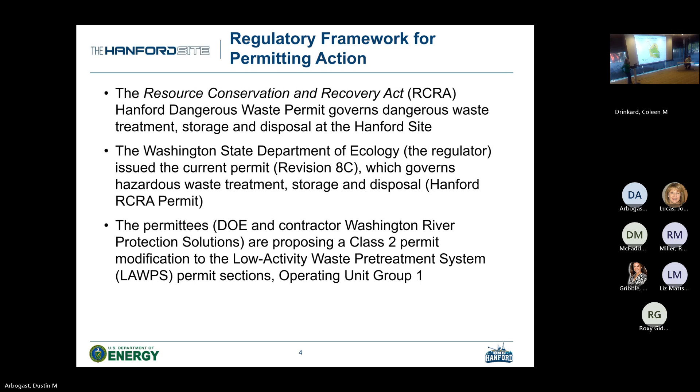The Tank Side Cesium Removal system, or TSCR system, is DOE's initial demonstration aiming to achieve low activity waste pretreatment capability under the Direct Feed Low Activity Waste Program. TSCR began processing waste since January of 2022, and has so far processed over several hundred thousand gallons of liquid waste.

As I mentioned earlier, the TSCR contains a filtration unit that removes the solids present in the liquid waste. It also contains an ion exchange column filled with a special type of media called CST, crystalline silicotitanate, which absorbs the cesium present in the liquid waste.

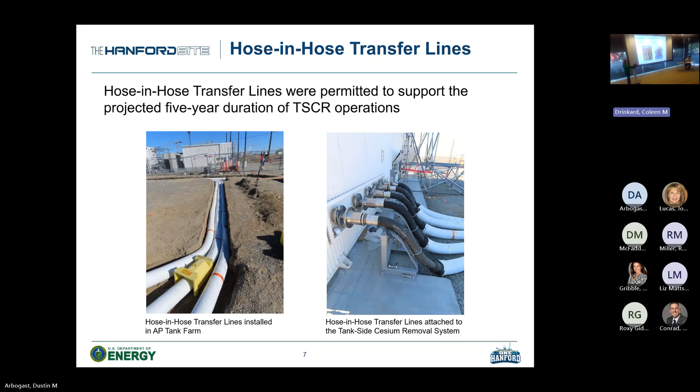The current permit mod states that the TSCR hose-in-hose transfer line has a 3-year service life, and after 3 years it will be replaced by another set of transfer lines. Any use of the TSCR system beyond this initial demonstration period will require hard-walled piping.

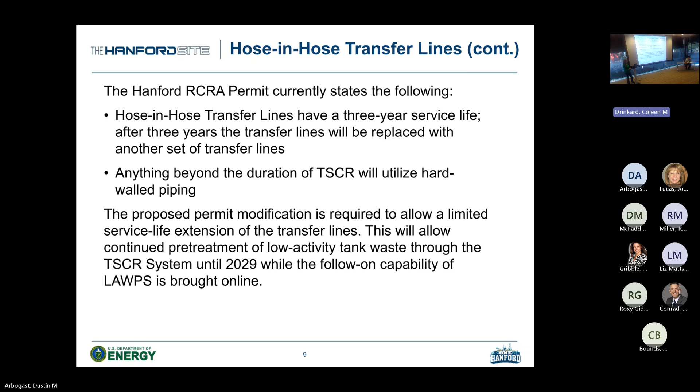So we are proposing a permit modification to allow a limited service life extension of this TSCR hose-in-hose transfer line until 2029, that is 10 years from the manufacture of the line. This extension will allow TSCR to continue treating liquid waste until phase 2 of the low activity waste pretreatment system project, the LAWPS project, is launched as the follow-on capability for continuing pretreatment of the liquid waste.

As part of monitoring the TSCR hose-in-hose transfer line, there are leak detectors installed at the low point of each transfer line. TSCR operators also perform routine radiological surveys of this transfer line, and at the end of each processing batch these transfer lines are flushed. So far, no problems have been experienced with this transfer line.

This TSCR hose-in-hose transfer line was procured under the same specification as the hose-in-hose transfer line currently used for single shell tank retrieval operations, and the life extension methods established for that retrieval operation line have proven successful. A similar life extension engineering evaluation was also performed for the TSCR hose-in-hose transfer line.

This service life extension engineering evaluation is an established process which factors in multiple criteria like processing conditions, chemical composition, radiation levels, ambient conditions, and other relevant factors to ensure that the integrity of the TSCR hose-in-hose transfer line is maintained during extended use.

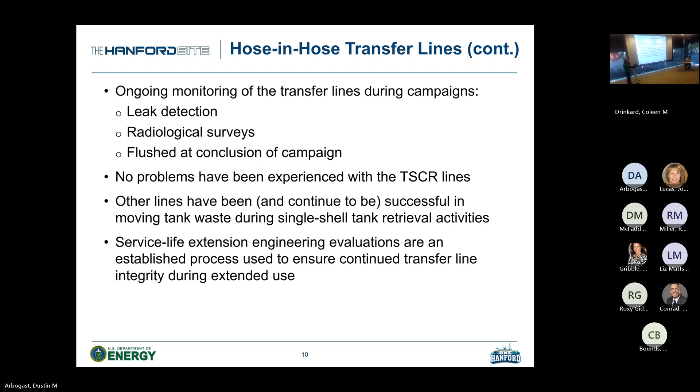This proposed permit modification would extend the service life of the TSCR hose-in-hose transfer line from 3 years, from the start of its first use, to 10 years from the manufacture date. The first component of the TSCR hose-in-hose transfer line was manufactured on May 1st, 2019. So we are proposing the service life extension of the line till May 1st, 2029.

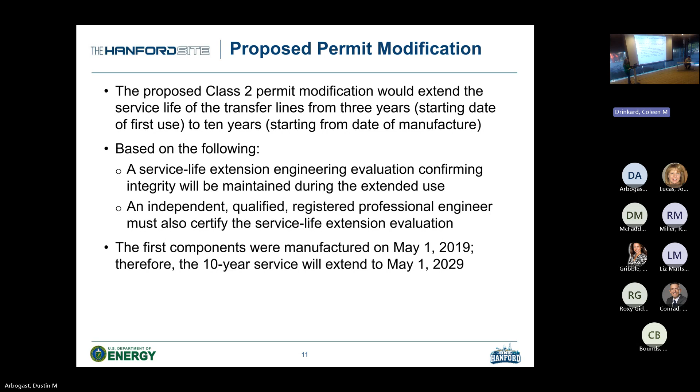As mentioned earlier, we performed a service life extension engineering evaluation for the TSCR hose-in-hose transfer line, and that evaluation confirmed that the integrity of the line will be maintained during this extended use. In addition, an IQRP, an independent qualified registered professional engineer, certified that the factors evaluated during this service life extension will not degrade the transfer line before its maximum life is reached.

This proposed permit mod will update the following sections of the permit, which include the unit specific permit conditions, addendum C, the process information section, appendix 2.11, the IQRP report section, and the last one, appendix 2.15, the operating documents. That brings us to the end of my presentation.

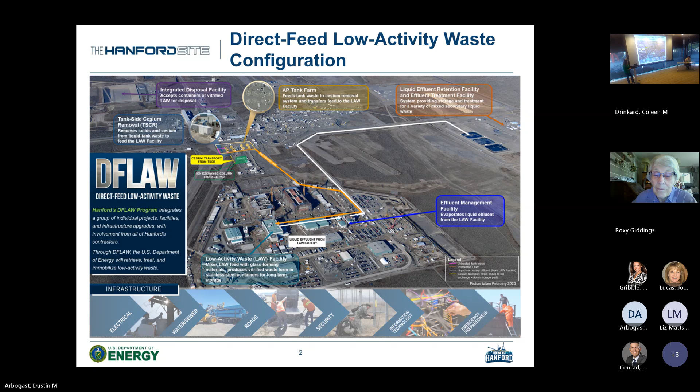But anyway, I was curious about how long this line is. I'm looking at the map and I don't know which line it is - is it the yellow line or the white one on the map? Can you go to the next one? This one. I can't understand you unless you really enunciate.

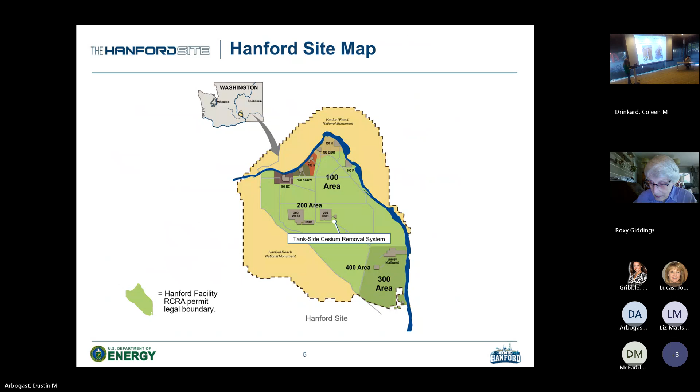That's a lot of line to replace if it goes bad. I guess I have a general question - what do you do with all of this line work at the end of its life when you don't need it anymore? I'll refer that question to Tom to help answer.

Yeah, this is Matt Covers, I'm the operations manager at WRPS. At the completion, once we're done with the hose transfer line, that hose will eventually be removed once we're done using that line.

Did that answer your question? My son's helping me now, I can't understand what you just said. The only thing I could understand was, does that answer your question? I'll speak up a little bit.

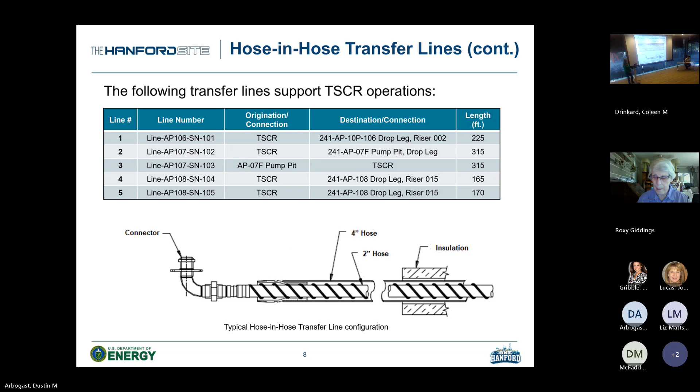And all of this is above ground, so it can be taken care of when we have to. I mean, everything that's touched is radioactive eventually, so everything we put in now will have to be taken care of in some kind of a giant garbage dump.

I'm having trouble with the scope of the process because I knew it was going to be big. I grew up in Pasco, 9 years in Pasco, so I'm a downwinder, and I've been following this since the 1940s. So good luck with this, I hope it works. I hope we can keep these things working properly. And someday I hope we can get this glassification going, because it sounds like the one and only thing that can really protect us.

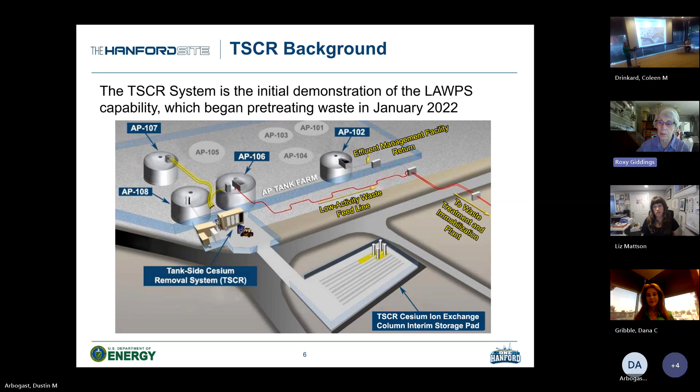The other thing is, I don't think that we should allow any more radioactive waste to come into our state to be taken care of by anybody, anywhere, anytime. And that's the law. As far as I know, they haven't changed the law that if we can't take care of everything here ourselves for what we have, we should not accept anything from anyone else. I'm very concerned about these new little plants that think they're going to stick up all over on campuses and things like that, that will have radioactive waste left over that they will need to get rid of. I do not think we should accept it. I think they should know it now that we will not accept it because we are still struggling to take care of our own. We have a whole river to save. I really think we should put our foot down.

Right, Roxy, you make some very good points. As a friendly reminder, all comments need to be submitted in writing, either electronically or you can snail mail them in. And anyone who has thoughts, points, questions, things you'd like to ask, please put them in a comment so we can have those answered and clarified. So I don't see any more questions.